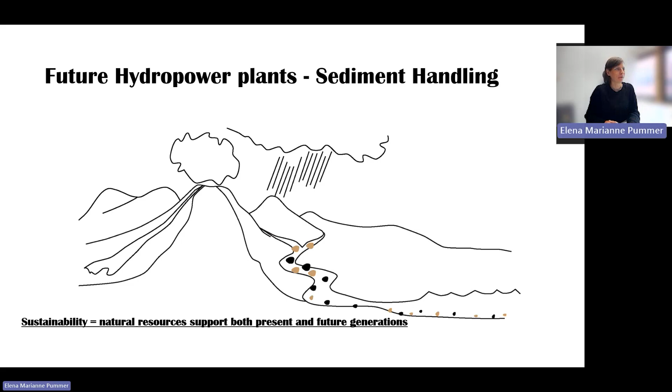So I will give a short introduction on our work package, and then later Jim will proceed and Silesh with some more detailed presentations. So our work package, sediment handling, is within the future hydropower plants work package, and that is led by Jonas Bergmann-Paulsen.

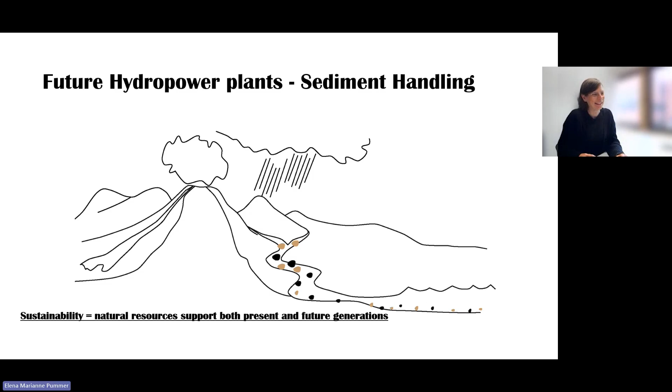And the question that was asked was, what is the ideal hydropower plant in the future? And it's, of course, a sustainable one. So we would like to use the natural resources in a way that we also support future generations. So I have here a very simplified picture of the sediment cycle. We have the sediments that go from the mountains to the sea, and then new sediments will be produced, and it should be a cycle. And an even more simplified side perspective of a river, sediments and river ecosystem, and how it will flow downstream.

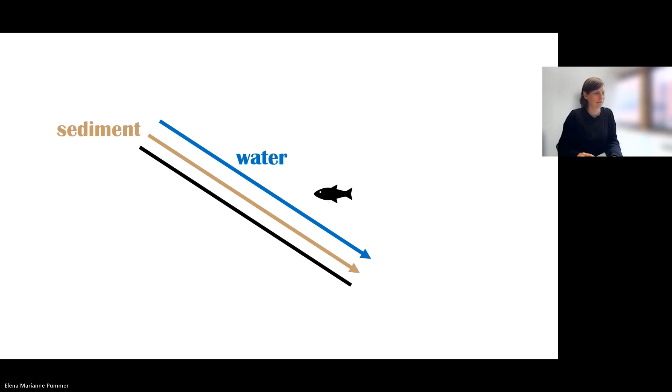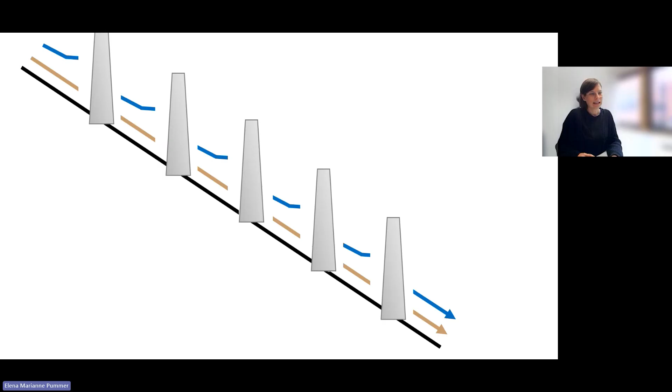So if we build hydraulic structures, then we will interrupt this system. And if we build several, then even more. And these hydropower plants can have a very different setup, as we all here know. So the upstream and downstream effects of the hydraulic structures depend a lot on the plant itself, what kind of hydropower plant it is, but also a lot on the environmental system and the river system. So what is locally happening? How is the hydropower plant run? How is the operation? And how is the sediment management strategy of the plant?

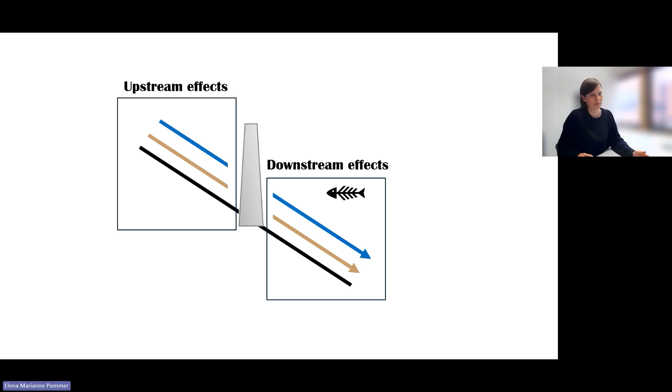So the World Bank said last century was used to build hydropower reservoirs, and this one will be used to solve sediment problems. So that's where our work package is working, and we work on several topics related to that. I think most of you should know the different management strategies. So we can either reduce the sediment yield from upstream, with check dams or slope protection, for example, so that we get less sediments into the hydropower system. Then we can also remove them through dredging, for example, or exclude them with sand traps. We can route them around or through the hydropower plant, or bypass them. And we can also have adaptive strategies so that we change the dam height, for example, or we change the turbines.

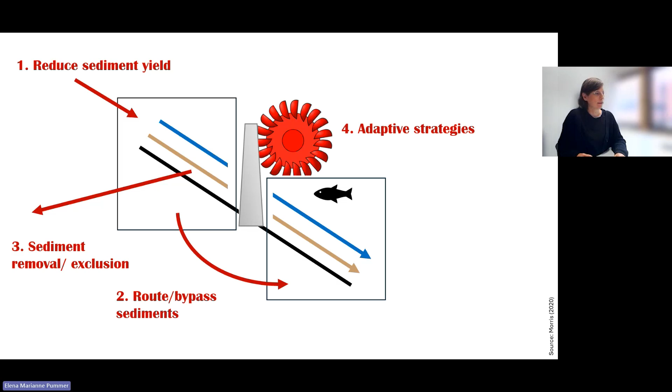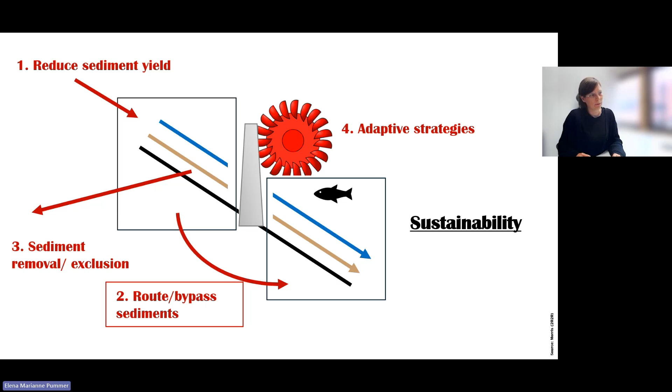So what we want is the most sustainable solution, of course. So what is very favored is getting the sediment through and getting as close as possible back to a natural situation. And there are several ways how we can do that, so it's not just through sediment routing. And of course, we also need economically sound solutions. And that should not be just from the business perspective. It should also be useful from the macroeconomic perspective.

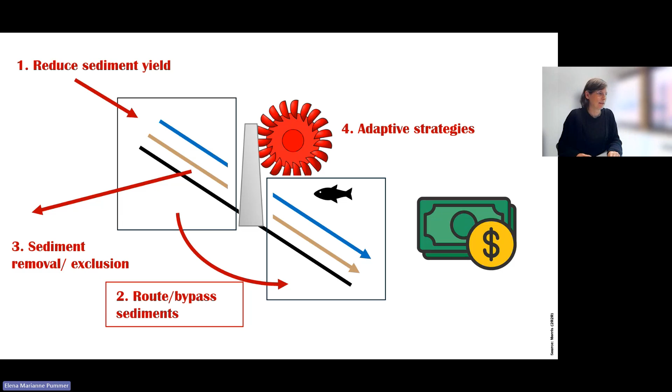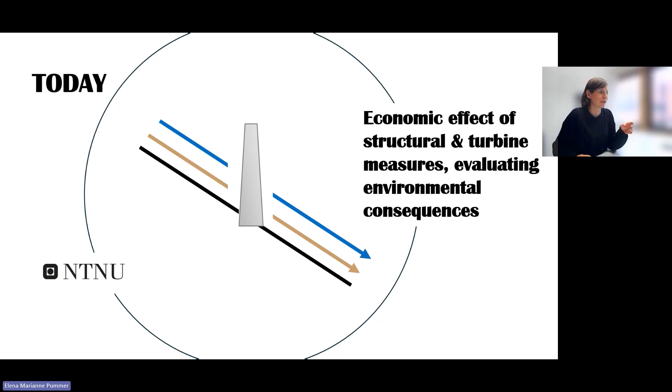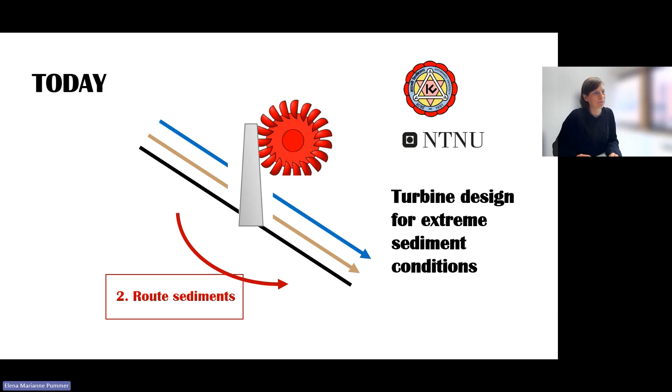So today, Jim will start to give an overview of what has been done already and what is planned on the economic effect. And then what we will combine in this work package are the structural measures and also the turbine measures. And in addition, we will evaluate the environmental consequences. So what is needed for that is that we also have insights in the turbine and the structural measures. So that will be the second part, where Silesh will present on the work from Kathmandu University and how their turbine design can be improved for extreme sediment conditions. And then, as Juliet said, this is the first presentation from a series of sediment presentations, so we will have a couple more lunch presentations on sediments.

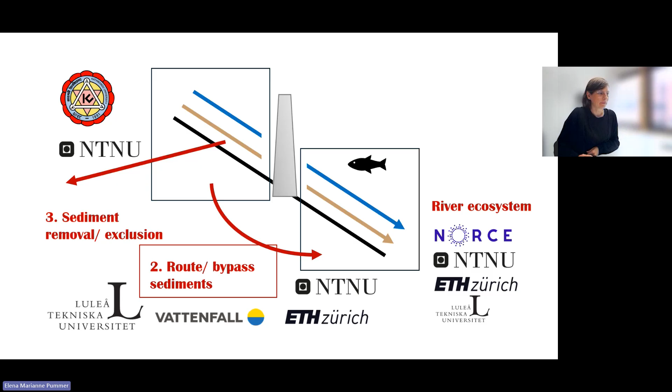And we also work on sand traps together with Kathmandu University to also compare. Jim will also show some details on that. We work on the routing and bypassing of sediments, so sediment bypass tunnels, for example, but also how the sediments flow in the hydropower tunnels themselves. And we work on the river ecosystem itself. And we have a lot of project partners for that. We have till now three test cases, and we will have some more, but these are the ones we have worked on so far. And here are the names of the partners from the project.

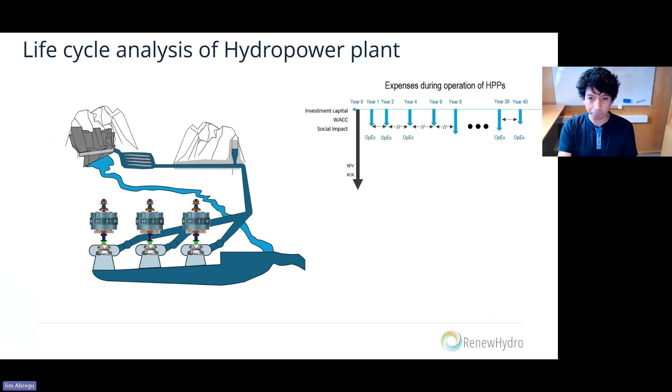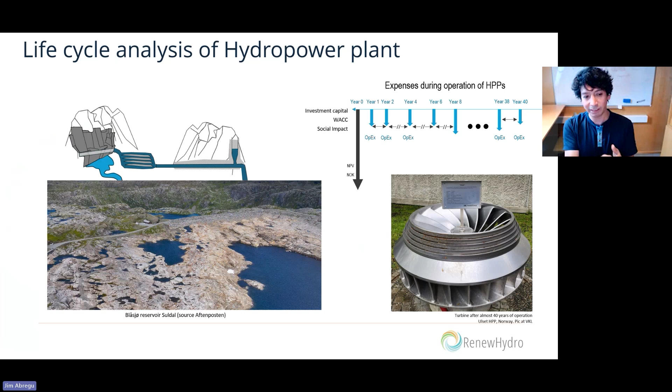And the same with this example of a reservoir in Suldal. I wish to point it out. Yeah, we see here this is the limit of the border of the dam, and we don't have any sedimentation here, so it's a normal cycle of a hydropower plant without any issues about lost volume.

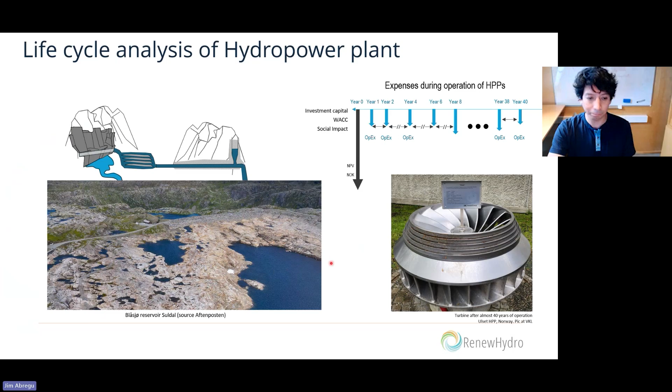And when we analyze this with hydropower but with sediments, we deal first with loss of storage capacity, because all the sediments start to get trapped in the dams and create the loss of capacity. And that leads to dam maintenance. So we need to do maintenance of the dam, to try to recover the capacity that was planned at the beginning, or at least some part.

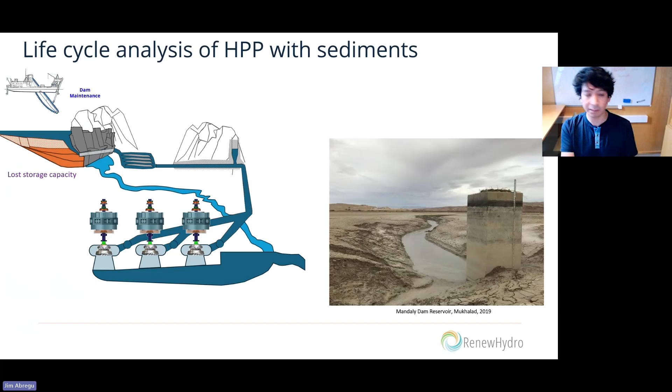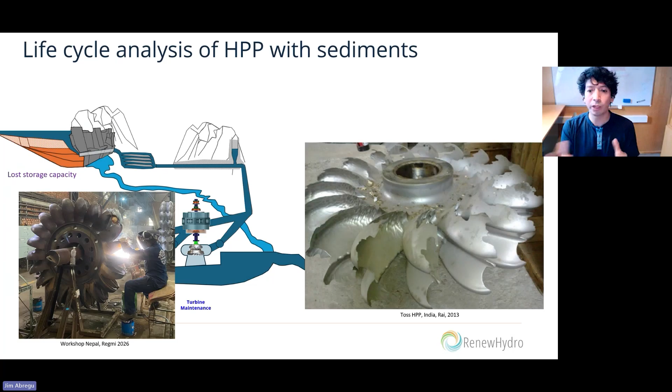Also there is the sediment erosion on the turbines. The turbines have these effects. All the sediments create this effect like a sandblast and destroy the surface of the turbine. It creates loss of material and cavitation effects, and we need to introduce turbine maintenance because we need to recover the original geometries, not only for the sake of the turbine, but also for the loss of efficiency, because we are losing water, with less efficiency.

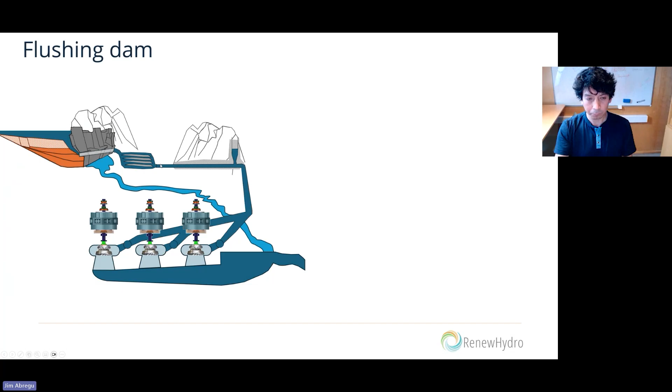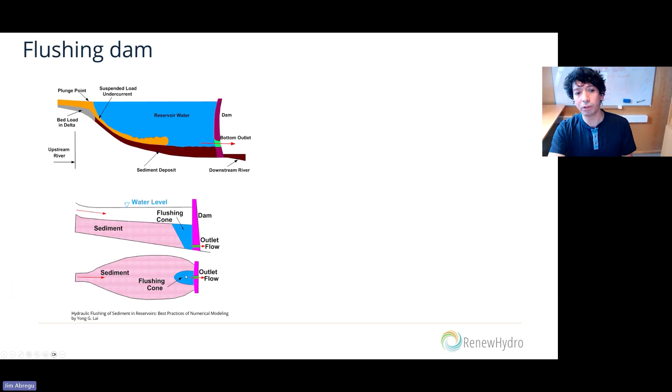Before, there was this example of flushing dams, because it was another way to recover some capacity. Just open the gates in the bottom part of the dam and flush. This is more or less the structure. You see here, we have bottom outlets in the dams, and you can open them and flush the sediments. But it's to recover only some part. It doesn't completely recover all the capacity.

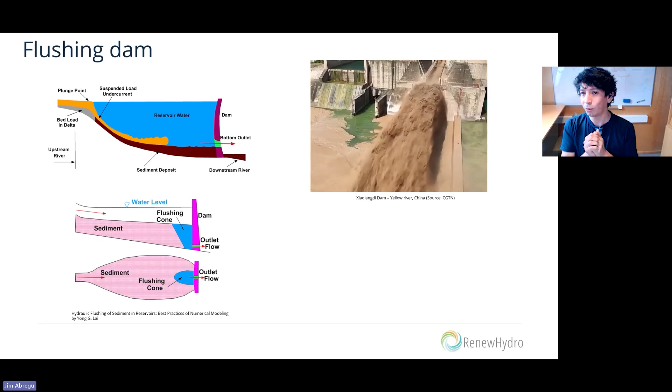Here we have some videos about that. For example, this is in the Yellow River in China. As you can see, the color of the flush is a little different from the color of the other water, because of the concentration of sediments. Also, this is in Salal Dam in India. You will see the same. The bottom part of the water has more sediment concentration compared to the upper layer, and that's why you have all the flushing of the sediments.

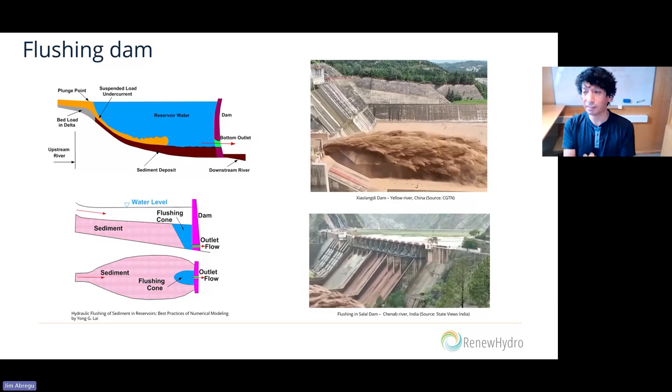But okay, as we see now, it's easy to figure out that we have problems with the life of the fish, the environment of the river, and impact, no? This is a problem that was growing. For example, this is the flushing dam regulation timeline in Switzerland. As you can see, before 1971 there were no regulations at all, so you could open as much as you wanted.

In 1971, they created this flushing timing to have more regulation about the timing, when it's optimal to open the gates. But still they found some problems. After 91, they regulated 10 milliliters per liter strictly, but this created some problems after 2012 because most of the dams were filled and without proper safety.

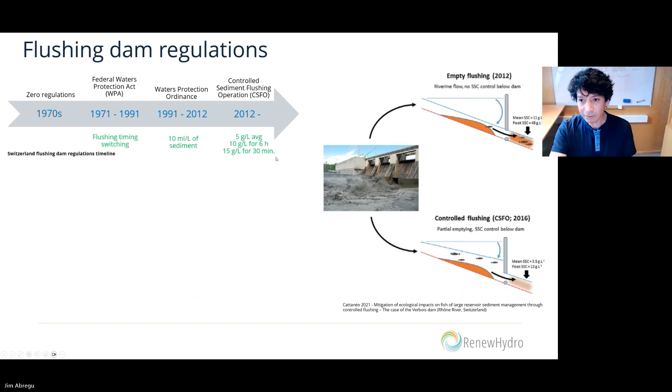So after 2012, they have this 5 grams per liter, 10 grams per liter maximum for 6 hours, and 15 in 30 minutes. So this regulation is getting more strict all the time. And it is also growing in different places.

If we look now around the world, for example, France has the same regulation as Switzerland. Italy has less than 4 grams. Spain and Norway don't have too much sediment, so there's no strict regulation about how to clean the dams, but they have some focus according to the specific dam. In Nepal, the regulation is 20 grams per liter. In China, it's 110 to 200 grams per liter.

So that is very far compared to Switzerland, but we expect this is going to decrease over time, like the timeline of Switzerland. India has some regulations, and Taiwan coordinates according to typhoons. In South America it's case by case in each power plant.

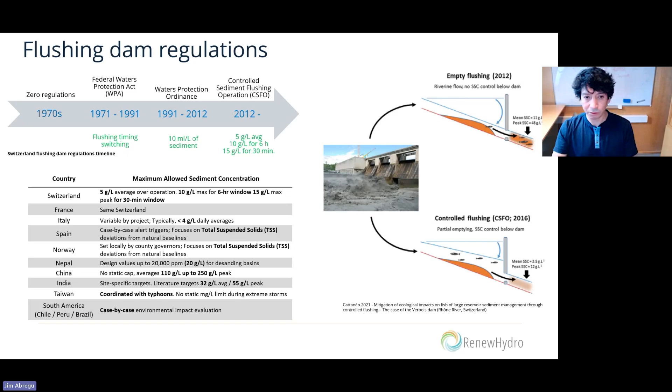Flushing is not an option, so we need to deal with decreasing that option. We need to deal with the impacts of hydropower plants on river biodiversity and agriculture, because we keep some of the sand with minerals useful for agriculture. So we have a reduced share of hydropeaking, and we also alter the thermal regime of the river.

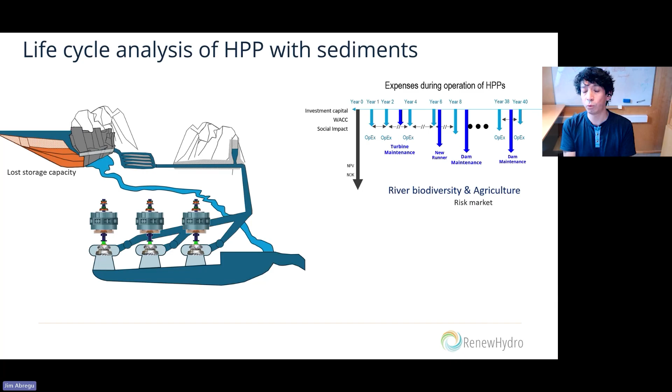How does this impact the economic life of the hydropower plant? We can see here, for example, this was the normal hydropower plant expenses. This is how it is later, because we have more turbine maintenance, a new runner after some time, dam maintenance, and so this increases the expenses of the hydropower plant.

And also we have the river biodiversity risk market. Why? Because this is difficult to measure. It's not like we have taxes to pay, where the tax is based on how we impact the river.

But we have the other way: we have the risk in the market, because most hydropower plants are in the stock market. That means reputation is important. If we have problems with river biodiversity or agriculture, it's going to affect the risk in the market for us. So in total, it's going to increase the expenses of the hydropower plant across all the alternatives.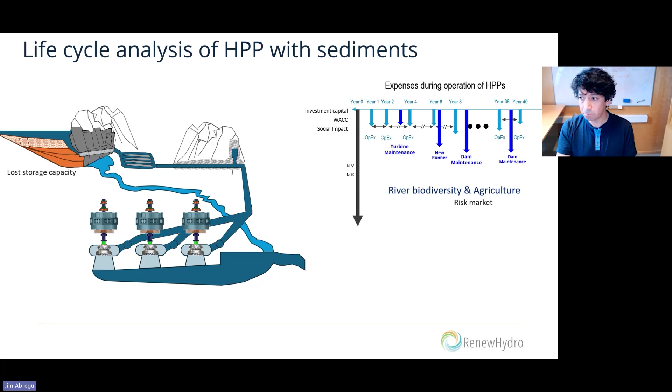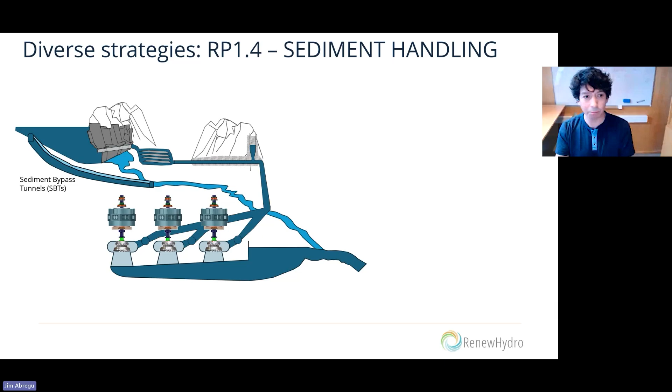So that's why we have this. What exactly are the strategies that we have? This was also explained by Elena. We have, for example, the option of the sediment bypass tunnel, so we can bypass the sediments. Also, the sand traps could be increased to handle more sediments, and we can improve the design of the turbines and operations, so turbines can handle more sediments as we pass the sediment through them.

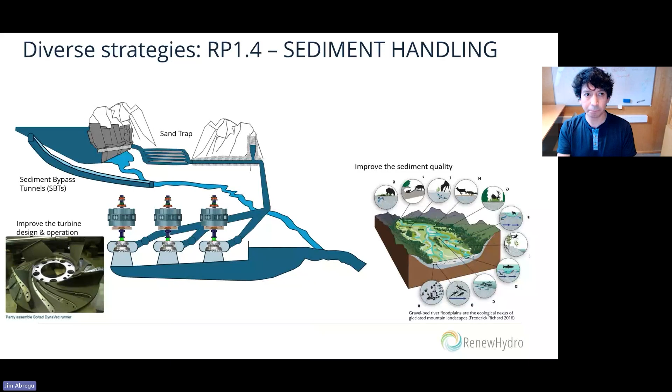And the final strategy is to improve the sediment quality downriver. All these strategies will be evaluated and measured according to the timeline of the hydropower plant.

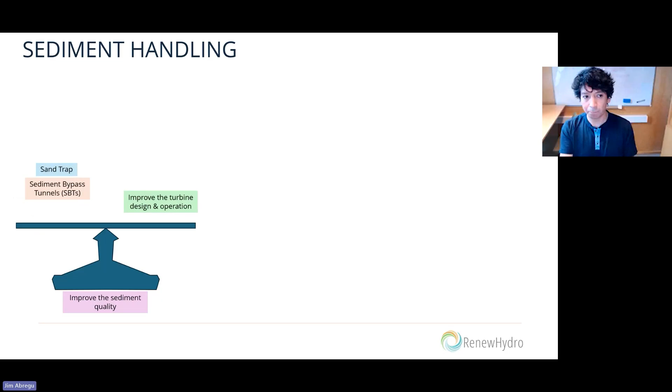We have these four pillars for the project: the sediment bypass tunnel, the sand traps, improving sediment quality, and improving turbine design. We have combined assessments and case studies, and everything will be integrated into the economic and environmental decision support model, looking at the complete timeline of the hydropower plant, including capex, investment in construction, all the operations, expenses, maintenance, security, and costs related to the risk.

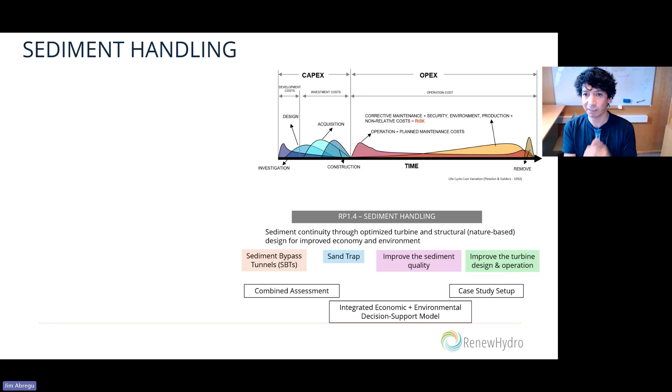That is for my part. More or less, this is the overview of the economic life of the hydropower plant. Now I will pass to Sailesh from Kathmandu University, who is working specifically on the turbines, as Elena mentioned as well. Thank you very much, Jim.

Jim pictured the holistic aspect of the project, where I'll be shifting a little bit towards the mechanical aspect and looking into what work has been done in hydropower turbines, especially in terms of sediment erosion, and what we will be doing particularly in this project, RenewHydro, from our side.

Just to give a small picture about the status of hydropower development in Nepal, since many of us might not understand this, these are recent data of hydropower development. We have now successfully installed more than 3,600 megawatts of capacity in Nepal. But if you look at the planned projects, more than 36,000 megawatts of capacity are still in the developing phase, in different stages of development.

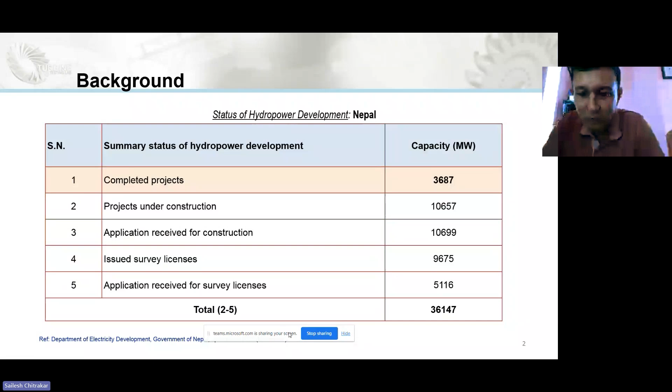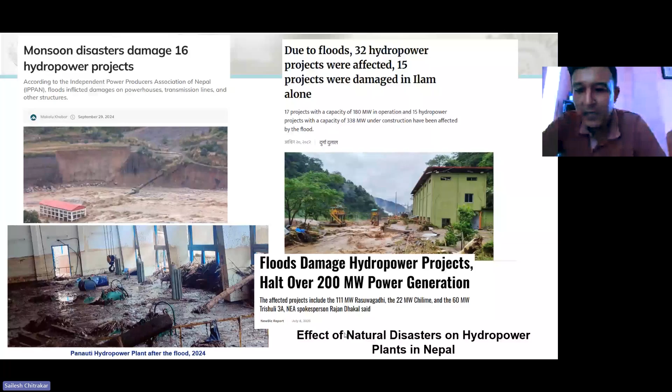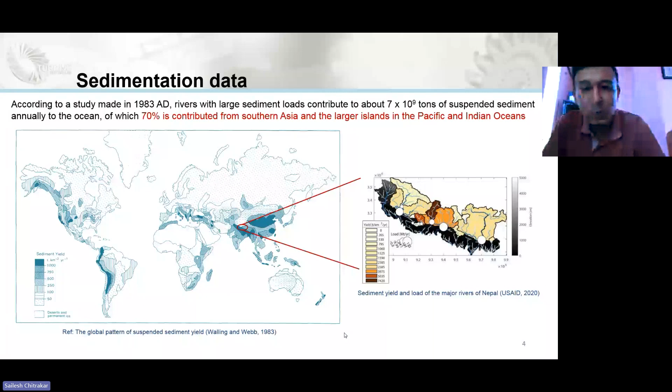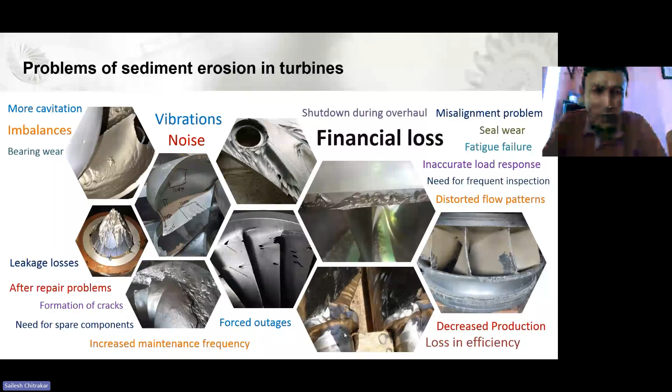I'm just quickly going to show you the timeline of the sediment erosion study at KU. It started in early 2000 when one of our professors, Professor Bhola Thapa, did his PhD in sand erosion in hydraulic turbines, where he studied that more than 50% of the sediment constituents in Nepal's sand is quartz, one of the hardest minerals.

Then we had some numerical simulations of Francis turbines especially. We built some erosion modeling in previous studies, and did some optimization of those turbines, and proposed a better design, and also did some experimental validations using simplified setups in the beginning.

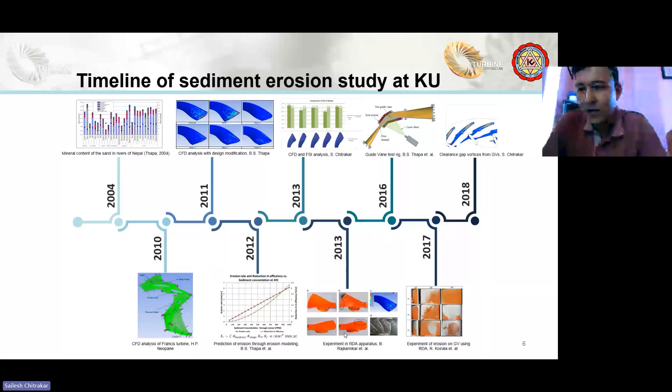Then my PhD was more related to guide vane erosion and how we can mitigate erosion in the guide vanes and runners by changing the guide vane profiles. So there were a lot of studies related to experiments and also related to CFDs.

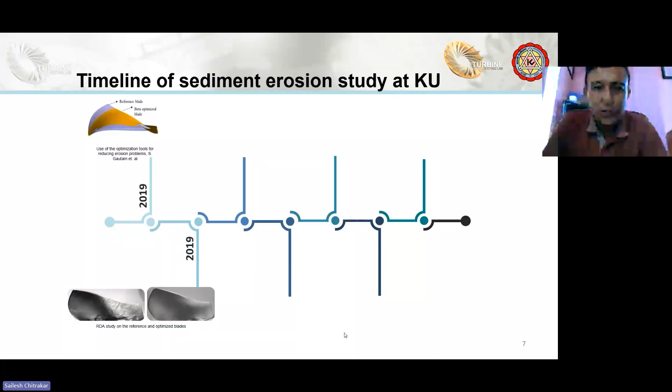We continued with different masters and PhD programs. Later on, we conducted several experiments on the optimization of the guide vanes and also runner blades, and verified that with experiments. Later on, we also built an experimental setup where we could test our optimization strategies and results.

Later on, we also moved to labyrinth seals of turbines and did quite many simulations and experiments.

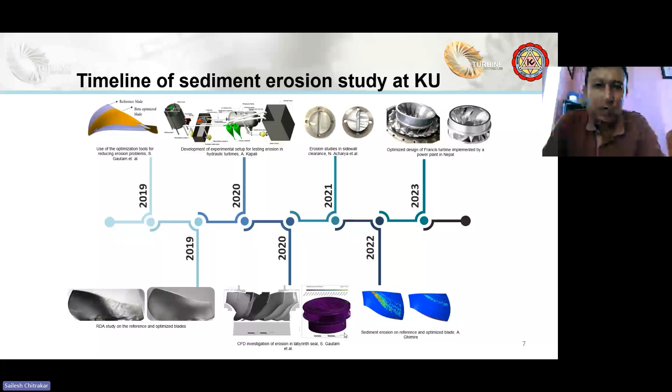We also then optimized one hydropower turbine, a Francis turbine, for the runner, to mitigate, or let's say improve, the impact of the sediments, and it was also later tested in the power plant. So a lot of studies have been going on in terms of sediment erosion here at KU and the turbine testing lab. Later on, as I said earlier, we plan to also provide services to hydropower companies, real hydropower companies.

So this was the runner which was initially very much eroded. Then we did, Amul was one of the researchers in this project, where he designed a completely new runner set for the power plant, maintaining the main dimensions.

I got this result just last week from the power plant. This ran for one monsoon season, and we could see that the new runner shows minimum impact of sediments on their runner blades. So that was one kind of verification of our optimization work, and it worked very well.

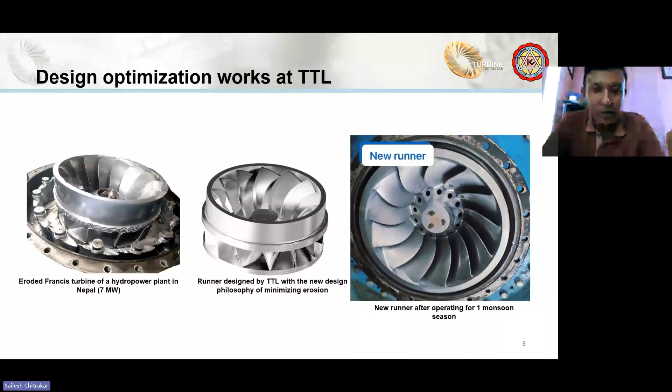So we are trying to bridge the gap between industries and academia here at KU. This is the turbine lab, if you have not been there. It is newly built, it was established in 2011, but other components were added year by year and component by component.

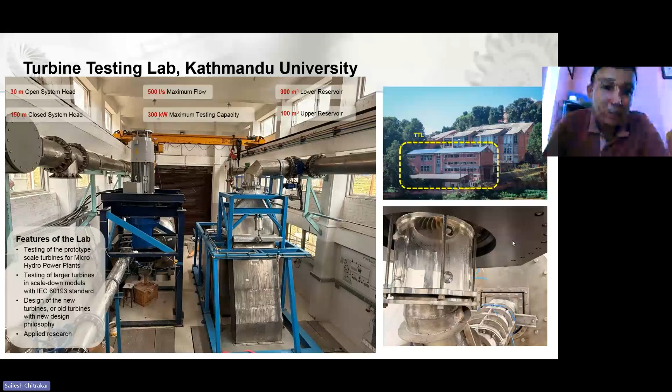But the thing is, the lab is not able to perform experiments including sediments, because then we would destroy our machine. So this is only for hydraulic testing of the turbines and conducting some other sophisticated measurements. But we also have a separate rig, a sediment erosion rig facility available, which we think we'll be using a lot in this project. In this rig, we inject sediments into the turbines, and also do measurements of the erosion on the turbine components. We have used this for several masters and PhD studies before as well.

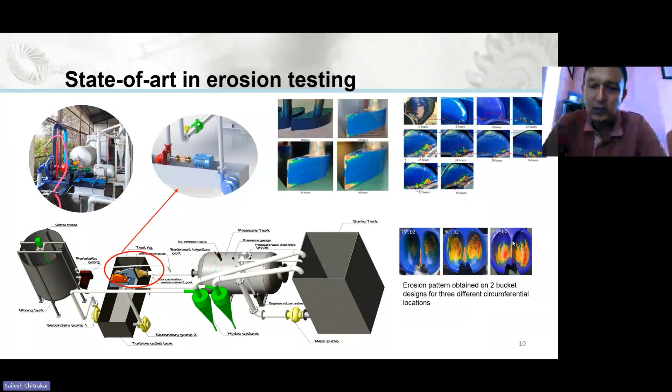Especially we use it for validating our CFD results. So with CFD, we get the results, but we need to make sure that the results are making sense. So in order to do that, we have come up with some unique experimental strategies.

For example, by coating the components with different colors, to match the experimental results with the numerical results. And we have got quite good results so far in the guide vanes, as well as for the runners.

And we have come up with some theories, or let's say some flow behaviors that match with our hypothesis, and we can clarify that there are some flow phenomena occurring inside the turbines.

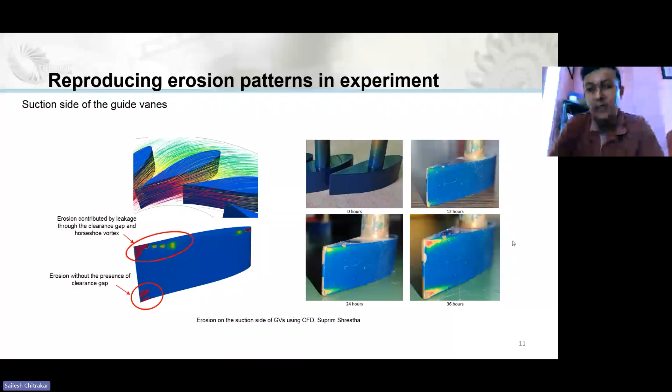So for these kinds of activities, we are using this experimental setup. You can also see the CFD results matching quite well with the experimental results. Different students build this setup based on their own requirements, and they do testing, and then it is taken out again. We use it for another testing.

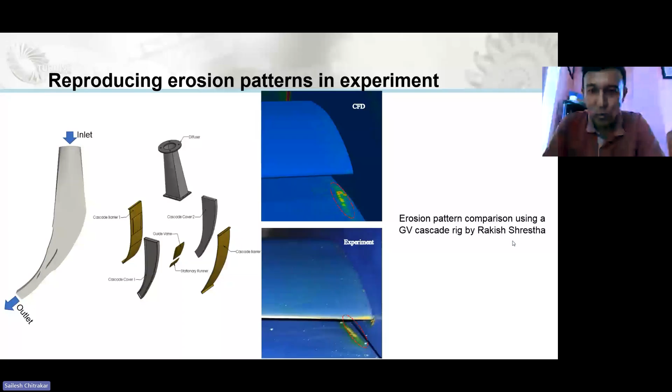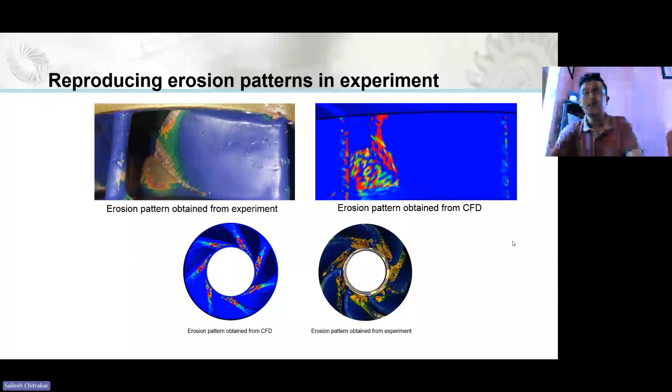This is for the Francis runner blades, where we can see that numerical results are matching quite well with the experimental results. Before this rig, it was really difficult for us to validate our numerical results, but this experimental setup is actually helping us a lot in doing these kinds of testing works for validation purposes.

And regarding the RenewHydro project, I think Elena and Jim mentioned it a little bit from their perspective. Also from the perspective of the turbines, when we have a desilting basin that usually traps the sediments with 90% efficiency for particle size greater than 0.2 mm.

If we plan to change the design, considering all the economic requirements like CapEx and OpEx that Jim talked about, then what will be the consequence of changing the size of the desilting basin?

For example, if we reduce the size of the desilting basin, of course it will cause less investment cost, but then it will increase the operational cost. But can that operational cost be justified? So that was one concern.

In this particular project of RenewHydro, our research question is: is it possible to increase the sediment load and size passing through the turbines with improved maintenance or design strategies, so that we can reduce the cost of the hydraulic structure? That is the research question.

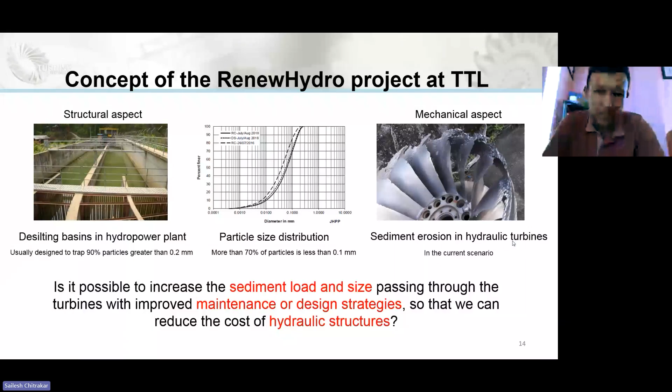So the planned activities for this project are, first, to study the erosion tendency for various sediment characteristics. We have mostly been working with different sediment sizes, so we will develop a correlation between sediment size and erosion for our turbine requirements. And then the mineral contents, concentration, and shape—these are some of the sediment characteristics we plan to study.

We have also been looking into developing a separate erosion rig, a very simplified setup compared to the one we have, so that we can go deep into the fundamentals of erosion and develop correlations and mathematical models between sediment characteristics, flow components, and erosion. Some of the erosion rig has been conceptualized now, and it is in the process of development.

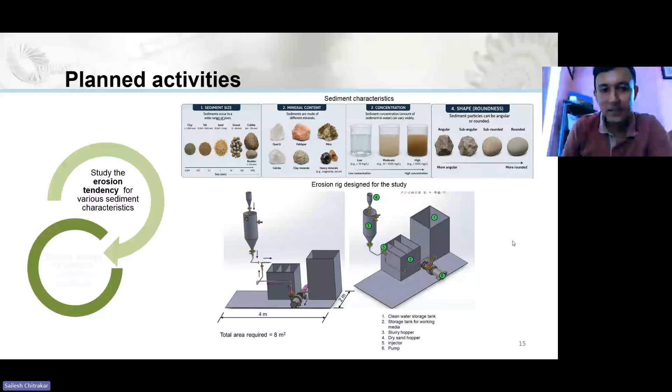The second part would be to design the turbine for extreme sediment conditions. Going back to our original studies where we optimized the design of the turbines, we will use that to redesign or rethink the design strategies to handle these extreme conditions—extreme in the sense of more sediment concentration and larger sediment size. So we'll be looking from these perspectives for our future studies.

We will be strengthening our numerical model, especially the CFD model, and we will be introducing a deformation model as well. We are thinking of creating a multi-physics environment between CFD and the structure, and using the deformation model, validating it with our experimental results so that we can validate our optimization strategies as well. So these are some of the planned activities for this project.